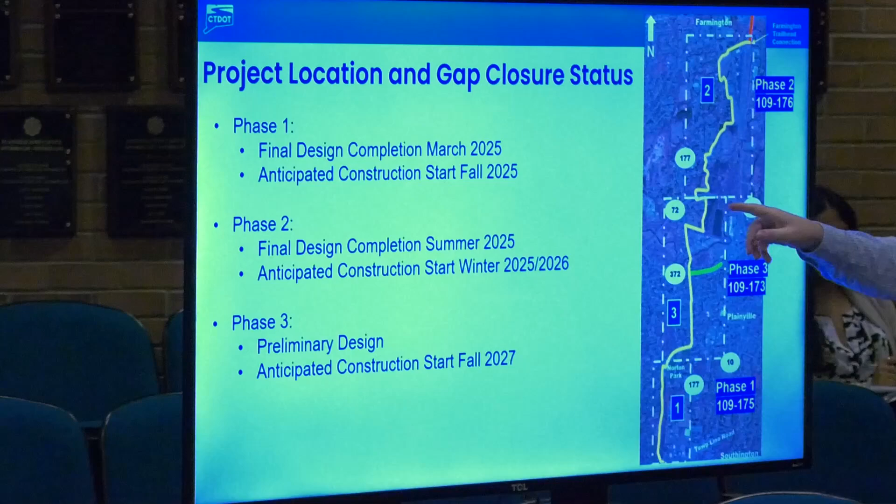Our northern section, known as Phase 2, is the trail connection up at Northwest Drive, approximately 2 miles south, through different wooded sections, through the Public Works and along Tomasso Nature Park, and then under Route 72. That is also in final design. We're getting final permits and submitting property maps. We're looking for design completion summer 2025, with an anticipated construction start around winter 2025 into 2026.

So those 2 phases are moving ahead in final design, which leaves us with our Phase 3 section. This is our middle section, what we call the downtown alignment. For today's discussion, we'll be talking mostly about Norton Park up to Route 372. Right now we are in preliminary design, with an anticipated construction start of fall 2027. For the southern section of the downtown, we're still in conceptual phases.

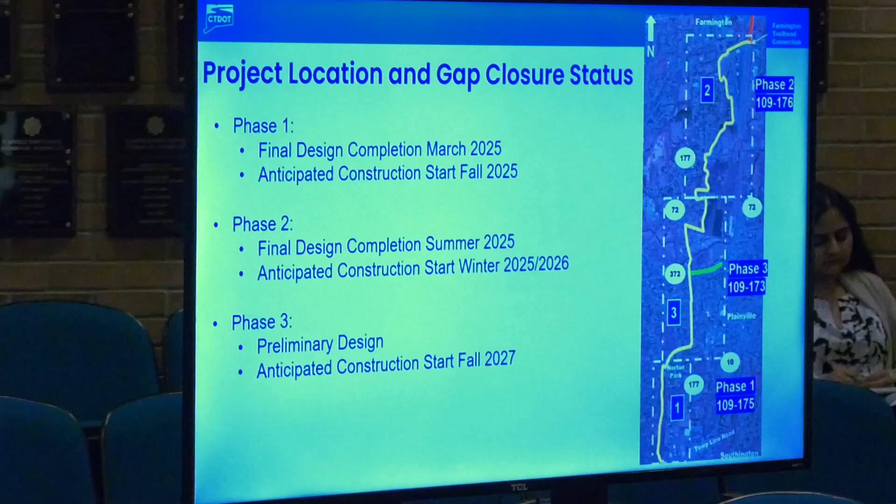So what is the purpose and need of the Farmington Canal Heritage Trail in Plainville? Our purpose is to close the final gap in the trail, again consisting of 5 miles. We don't just want to close it, but we need to provide the safest and most accessible facility for all users. When constructed, we're not looking at a couple people using the trail a day. On weekends and during peak seasons, we can see up to 1,000 users in a day, so it's going to be a very busy section.

Based on the number of users, we're not talking about avid cyclists. We're talking about families, elderly, people with disabilities. All ages and skill sets are going to be utilizing this trail. So we're not looking to build a trail for Lance Armstrong, we're looking to build it for everybody here.

When we met back in last spring, in March, we talked about two separate alignments. The first was the Pierce Street alignment, shown here on screen. From Broad Street, north is pointed this way. The trail would follow along the south side of Broad Street to the east, then cross Pierce Street, head north, and then head back west to tie into Route 177.

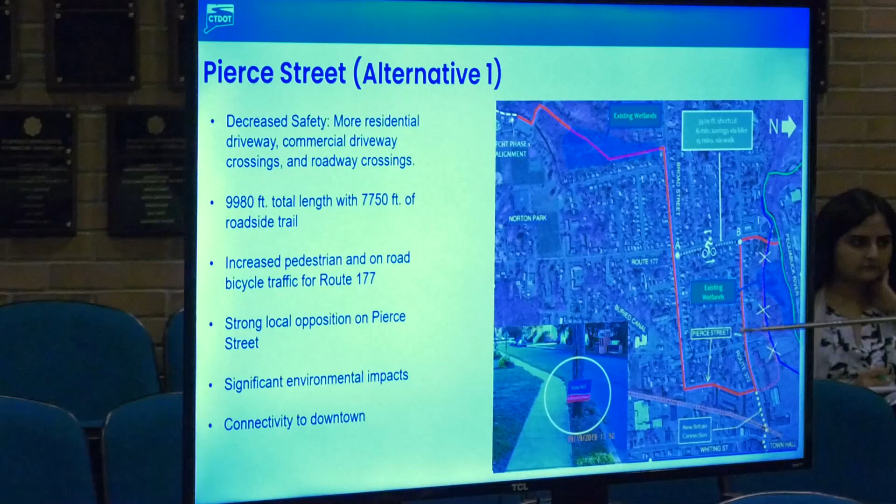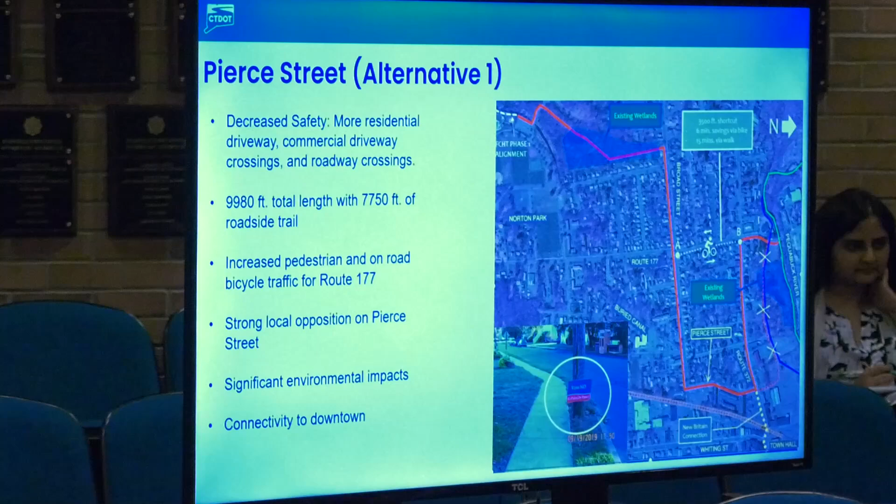Because of this significantly longer section of trail along the roadways, you're going to see a lot more driveway crossings, more street crossings, and greater exposure for pedestrians and cyclists to the adjacent roadside. That's a significant safety issue, and there's a high likelihood that once users take this trail section a couple times, they'll realize they can get from A to B between this intersection and that one and save six minutes on a bicycle, or fifteen minutes walking, by avoiding the driveways and streets. So over time, people are going to completely bypass this section of trail. Due to these safety concerns and the likelihood it will be skipped by everyday users, we are not proceeding with this design at this time.

So where does that leave us? We looked into what we call a preferred alignment, Route 177, Alternative 3. Basically from Norton Park, the trail would continue north on Route 177 through the intersection of Broad Street, then continue north through the intersection of Route 372, and cross the Pequabuck River. Significant advantages here: it's entirely on a state route, and it's a much shorter section from the park to this river crossing. Again, for safety, we're looking to get users from A to B in the safest possible way.

With reduced exposure along the roadway, and fewer driveway and street crossings, we're going to have a safer trail.

Now, this green line represents a spur trail. It would run along the south side of Route 372, be a little narrower, about 10 feet wide, and serve as connectivity to the downtown section. Our intent with this design is to help promote users to go downtown and support the local businesses there. So we're trying to accomplish two goals: get the everyday user from A to B in the safest manner possible, while still maintaining that downtown connectivity and support for local businesses.

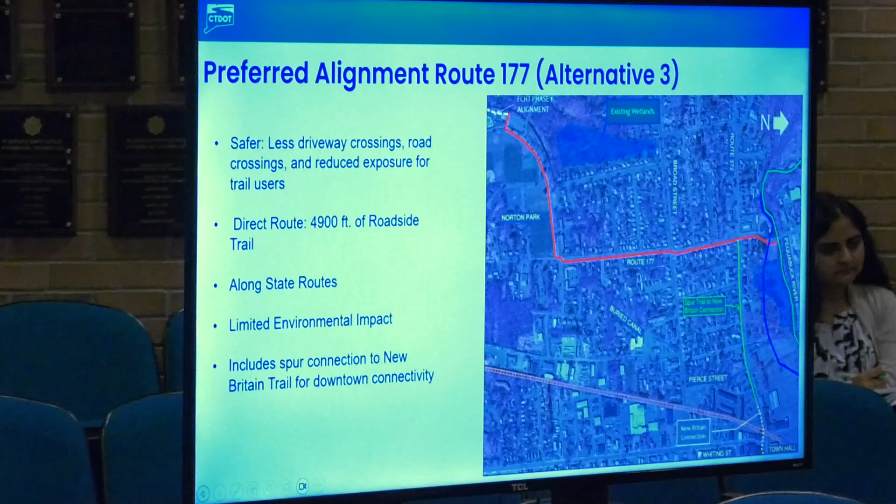Here it's kind of hard to see, and we have a printout of it over there—that's the downtown section color plan. You guys are free to take a look. I'm going to zoom in on this and talk about some of the features, because I know we can't see anything here.

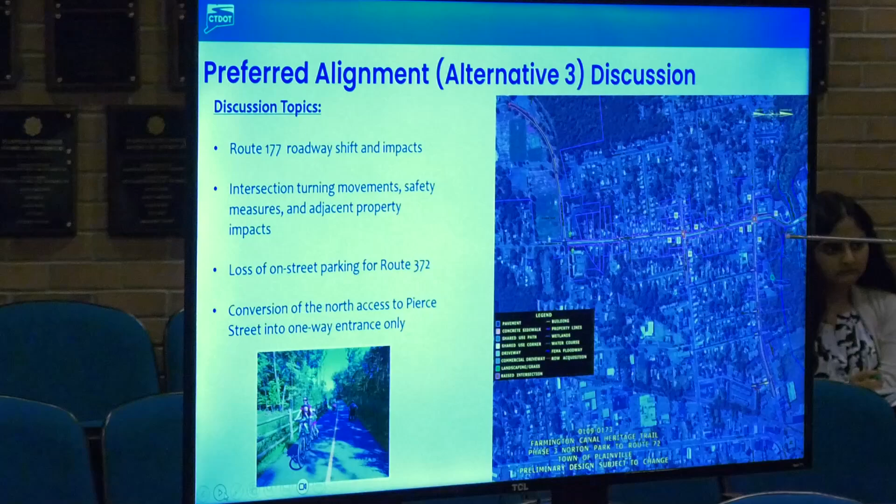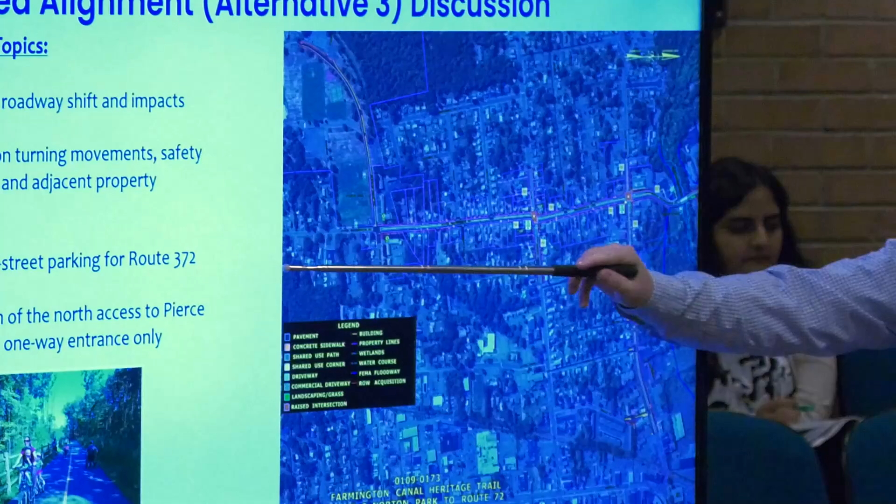When we last met with the town council, there were a couple of topics we wanted to follow up on: how Route 177 would shift and impact adjacent owners; how the intersections of Route 177 at Broad Street, and Route 372 at West Main Street and 177, would be designed; and how they'd accommodate truck turning movements with the roadway shift. Other noted concerns were loss of on-street parking on Route 372, and the conversion of the northernmost access of Pierce Street to one-way, which was designed for safety concerns.

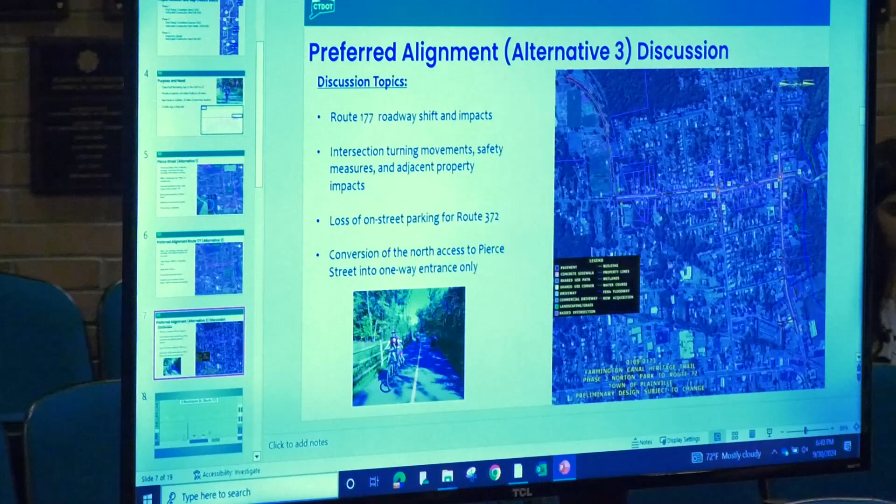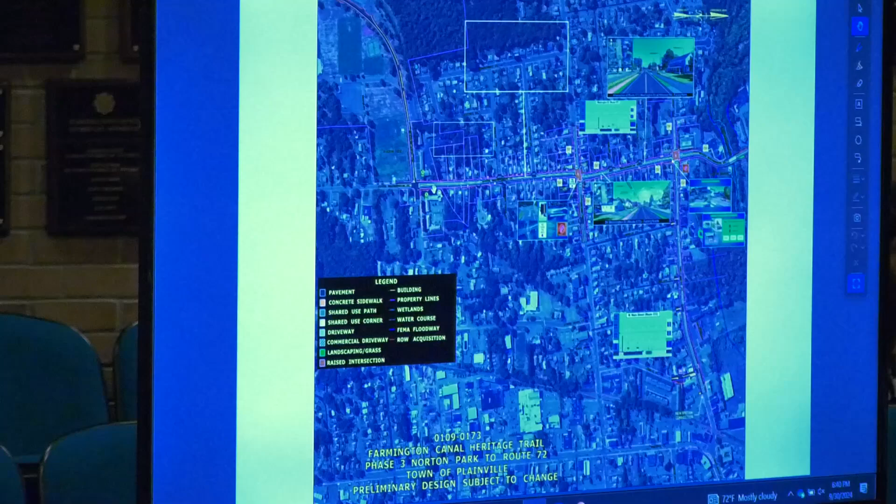What I'm going to do here is start at Norton Park, and then we'll work our way north along the trail, and come down the spur section. I'll zoom in on different features so you can see what our proposed design is and what some of those impacts are.

So let's start over here. The trail would follow along Norton Park, the existing gravel path, and head east where it would cross Washington Street. At this crossing, we would include pedestrian safety amenities such as a rectangular rapid flashing beacon, and then the trail would continue north along Route 177.

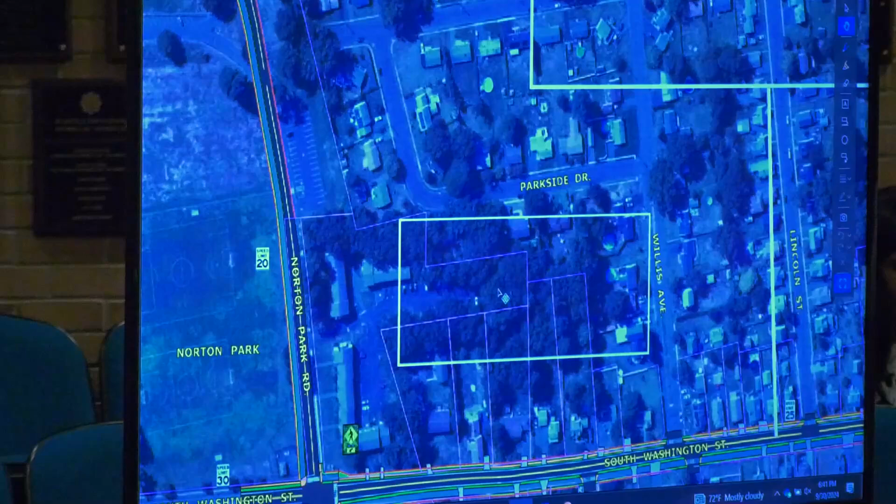See, does it want to load? Yeah. Just give me a second here. I might have to close out some of these files and reopen this. Sorry, folks.

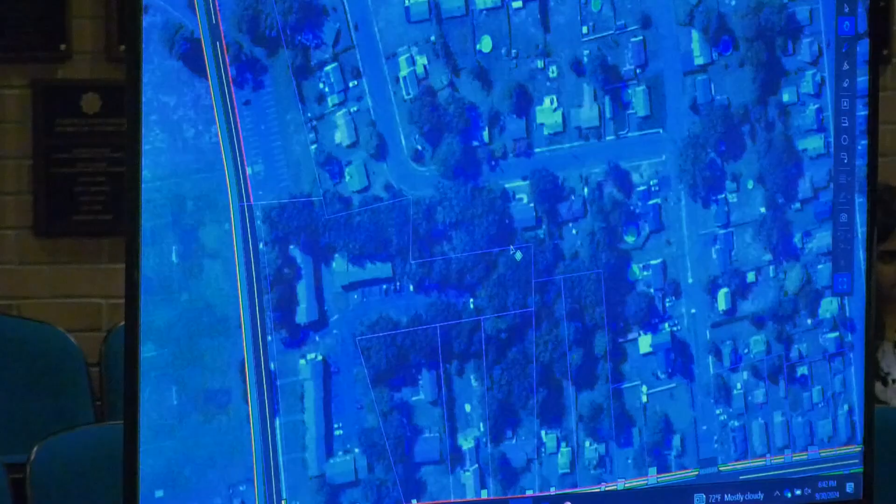All right, we're back.

So first I'm going to look at South Washington, Route 177. It's a little hard to see here, so I'll explain it. In order for us to build a 12-foot trail along the east side of Route 177, that would require us to shift the roadway, the center line of the roadway, approximately 7 to 8 feet to the west, and then tighten up the roadway geometry a little bit.

Now this would require sliver property acquisitions along both sides of Route 177. Approximately 1 to 2 feet acquisition on the eastern side of Route 177, and then slightly larger, approximately 5 to 6 feet, along the western side.

And then we have this image up there on that table. Here's a graphic rendering of what the trail will look like, to scale as best as we can. We don't have graphic design degrees, but this would include our 11-foot lanes, 2-foot shoulders, our grass buffer, and then our 12-foot trail along the east side of Route 177.

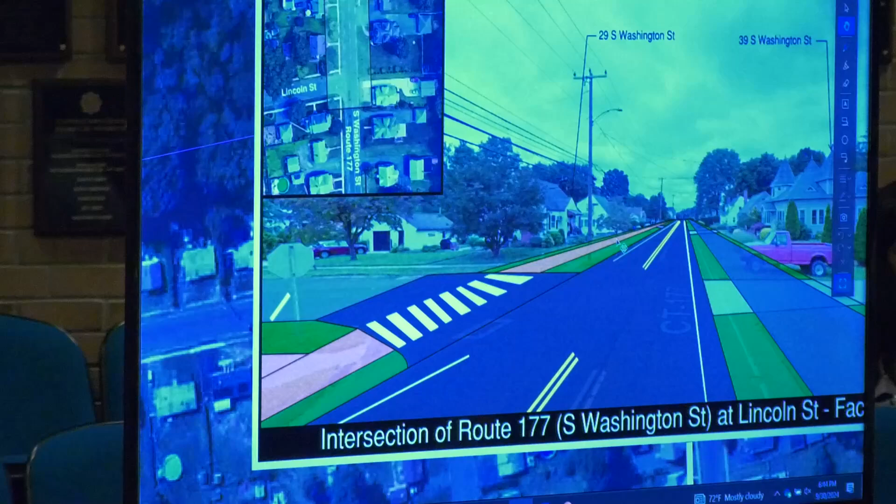So that's a pretty typical condition for South Washington Street. I'm going to jump up to the intersection here. This is Broad Street at Route 177. So some safety features we're looking to implement here.

Come on, man. Yeah, we're going to swap it. Luck with this computer.

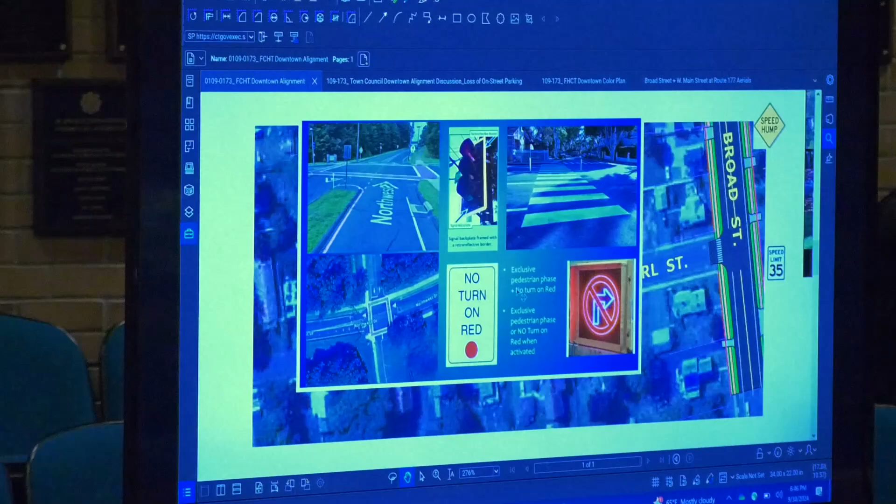All right, so hopefully I can get 10 minutes here without this dying on me. Sorry. Okay, so safety features at the intersection of Broad Street and Route 177.

What we'd be looking to do here is soften some of the curve radii, which is going to help with our turning movements, and I'll put up a graphic on that in a couple minutes. We're also looking to install a raised intersection, basically elevating the intersection slightly starting at the crosswalks, to help slow and calm traffic coming into the intersection, providing greater safety for our trail users and pedestrians. So it's not a speed hump.

These are designed with a kind of curve pattern, and they're only about 3 inches high in height. So basically, we'll be raising the intersection slightly to help slow speeds.

Additional measures we would implement at the intersection: this would have no turn on red for all right turns, and would have an exclusive pedestrian phase. So what does that mean? That means that if you ever push the ped button, every light will turn red, and pedestrians will have full access to the intersection, and vehicles won't be moving until those pedestrian crossings are complete.

So again, we're still at the same location in this graphic, looking at the intersection. That pink or magenta line, kind of like a T-Mobile color, represents the existing roadway geometry, the existing edge of roadway. The black line represents the proposed pavement. So you can see we're softening the radii or curves at each of those turns, which is going to help with our turning movement.

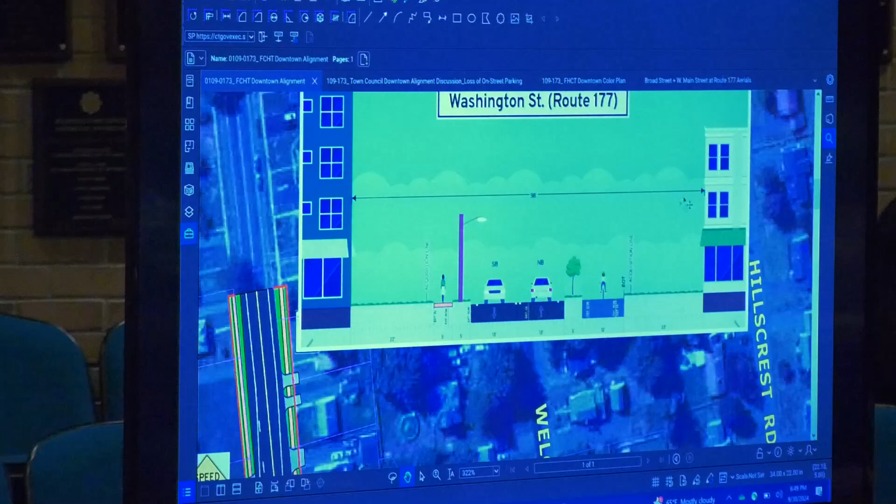In order for us to accommodate this design, it's a little bit less of a roadway shift. We're moving the roadway about 4 feet to the west. Same concepts with the grass buffer, street trees for improved traffic calming, the 12-foot trail, and more or less the same private property acquisitions on the east side of the roadway. On the west side, we're a little bit tighter. It looks like we're looking at about 2 to 3-ish feet of sliver acquisition along the west side of Route 177.

And then here is another visual rendering of what the trail will look like, or could possibly look like, along Route 177, given the dimensions that I just discussed.

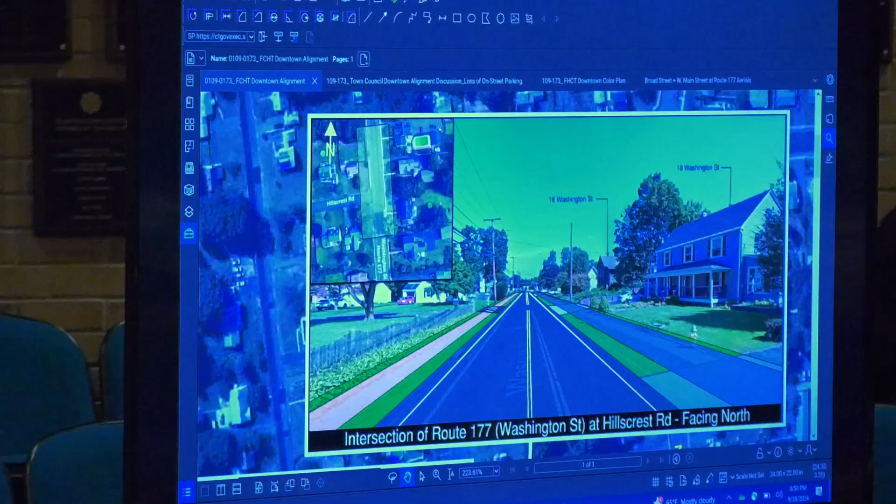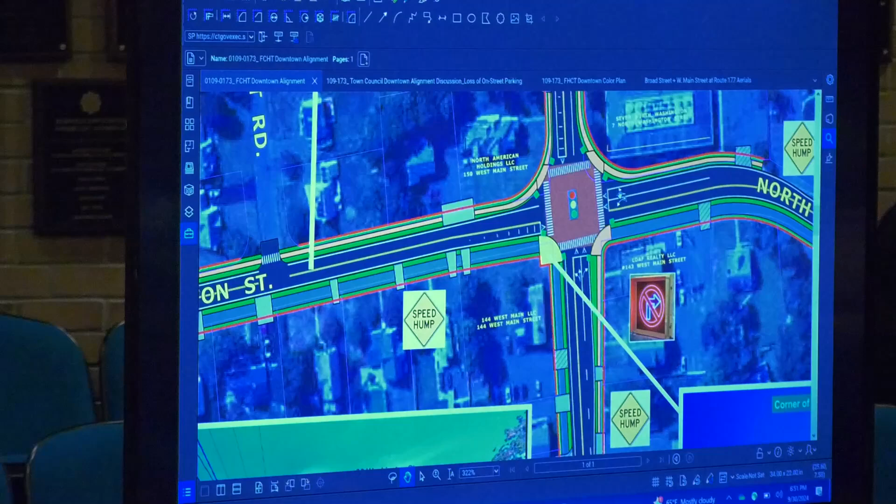Continuing north, same concept with the trail until we reach the intersection of Route 372, West Main Street, and 177. Again, here we have a lot of the same safety features. We're proposing that raised crosswalk, potentially no turn on red for the right turn movements, softer radii for those truck turning movements, and high visibility signal heads, basically to make it easier for everyone at night to see these signals. Additionally, with all of our trail crossings, wherever we need to increase illumination for safety, we would do so.

Again, looking at the same intersection, we're at 372 and 177. The pink line is your existing edge of road, and the black, the blacktop, is our proposed roadway surface. For both the right turn movements from Route 177 onto 372 heading west, and from 372 eastbound onto Broad Street to the 177 to the south, we are improving those turning capabilities to meet our tractor trailer truck needs. On the other side of the intersection, we're not improving those turning movements, but we're going to maintain the existing movement in order to avoid significant acquisitions from those two businesses at the corner — that's your northeast corner and your southeast corner.

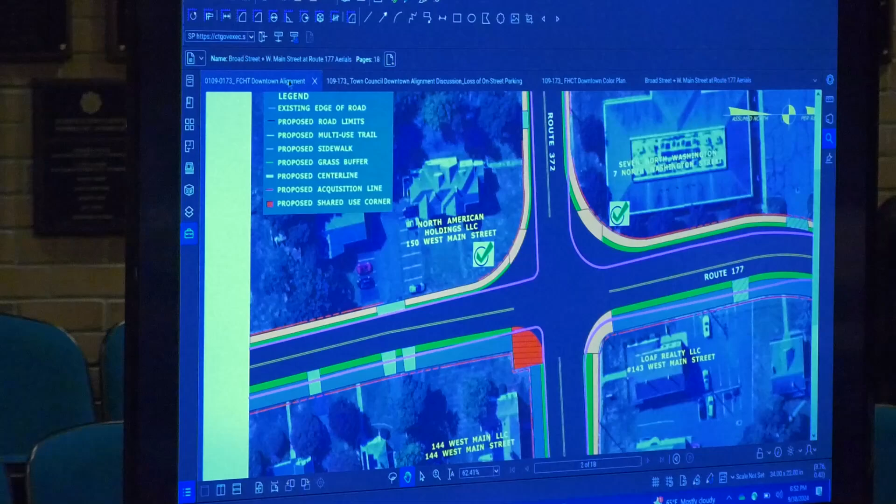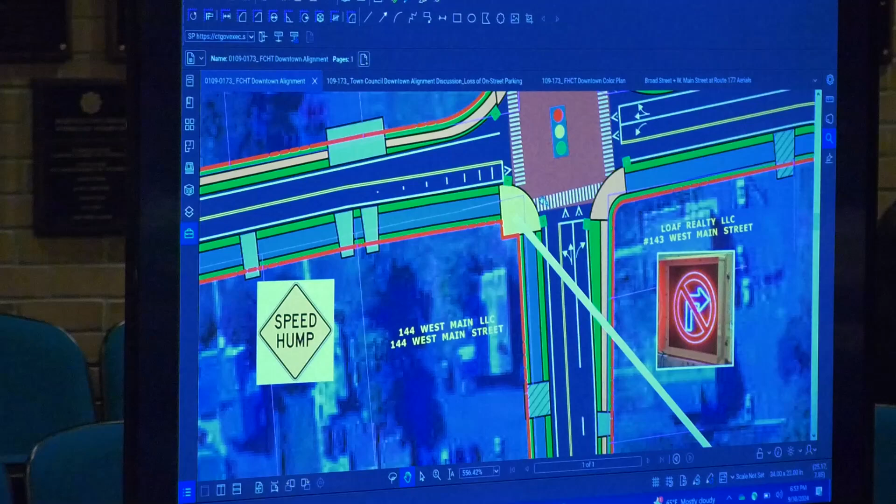Now, staying at this intersection, here along the southeast corner, one thing we're looking to do to help promote connectivity to the downtown and support local businesses is to provide this shared use corner along the southeast corner. It may look something like these other locations we found within the area, with benches, plantings, kiosks, and advertisements for local businesses, so they can help attract users to use that spur trail and make that downtown connectivity.

And again, here's just some more images of those amenities we'd be considering: planters, benches, and some form of sign directing users to the downtown section and how long that trip is going to take. So on a bicycle, we're looking at a 4-minute ride, and walking, about a 10-minute ride, with potentially advertisements that rotate out for the local businesses.

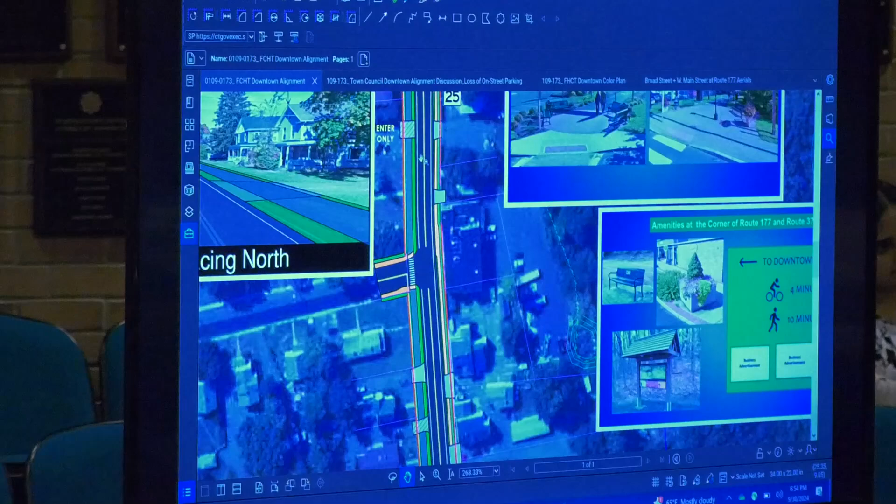Okay, so now taking a look at our spur section, it's a fairly similar design concept to what we were looking at on Route 177. So in order for us to get a 10-foot spur trail along the south side of the roadway, we're going to tighten up the roadway by going down to 11-foot lanes and 2 to 3 foot shoulders, depending on which side, while maintaining the existing sidewalk on the northern side. We want to tie in to the existing sidewalk where it falls today.

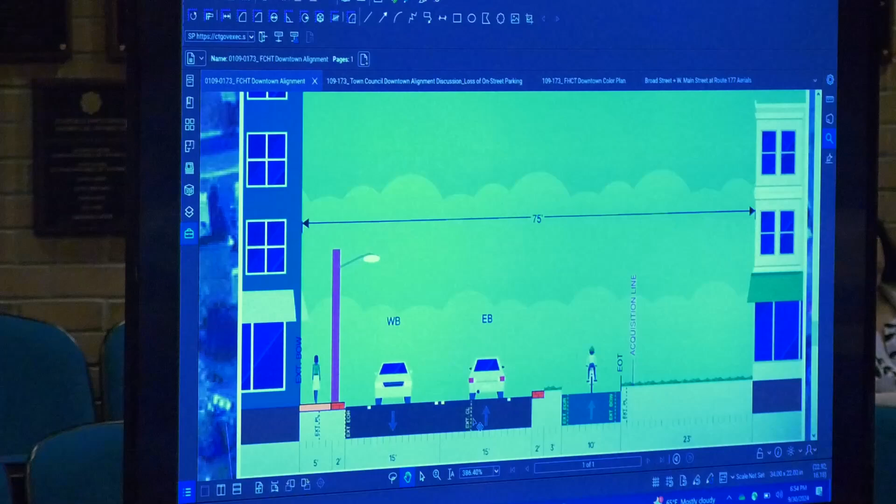So in order to do that, we want to keep the existing sidewalk basically exactly where it is now on the north side. To accomplish that, we have to shift the center line approximately 4 to 5 feet to the north along the roadway. We'll have 11-foot lanes, 2-foot shoulders, and the 5-foot sidewalk on the north side would remain, with a 2-foot buffer, either grass or stamped to match the downtown section of Plainville, and then a 10-foot trail for that spur connection. Here we're looking at fairly sliver impacts as well, 1 to 2 feet property acquisition along the south side of Route 372.

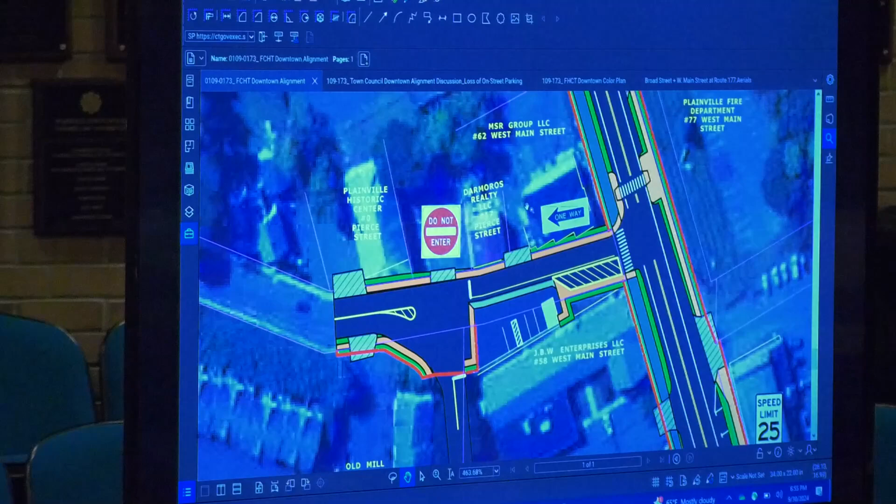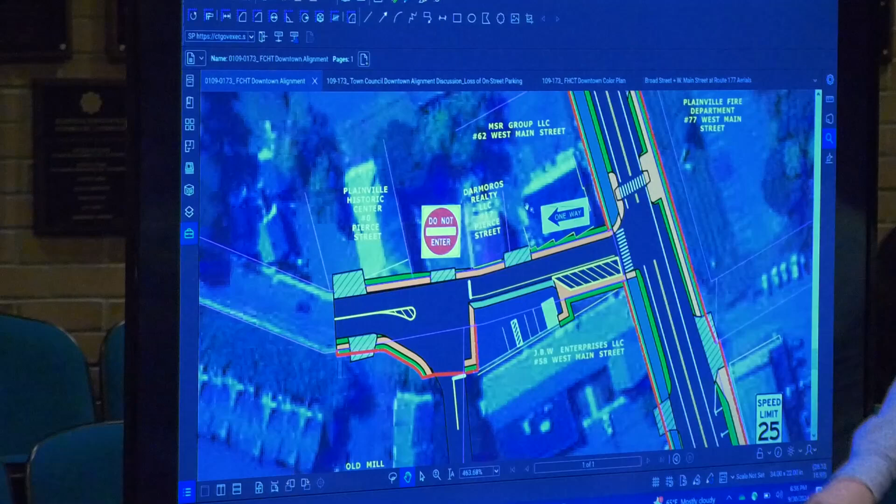Okay, so now we'll jump to Pierce Street. What we're looking to do on Pierce Street is convert the northern end of the street access to one-way. The reason we're looking to do that is to increase safety at this crossing. Because of this building here, number 58 West Main Street, the sight line from this side street is non-existent, so it's an unsafe condition for both motorists and trail users trying to cross here. So what we would do is convert this access to one-way, so you can make a right or a left from West Main Street onto Pierce Street.

Additionally, we have this yellow area here, which would be marked as no parking, and this would be pavement. The reason we have this here is because we know the fire department is here, and we do not want to impede their access down to this end of the neighborhood. So this area would stay paved, allowing the fire engine to make their right turn movement down this street.

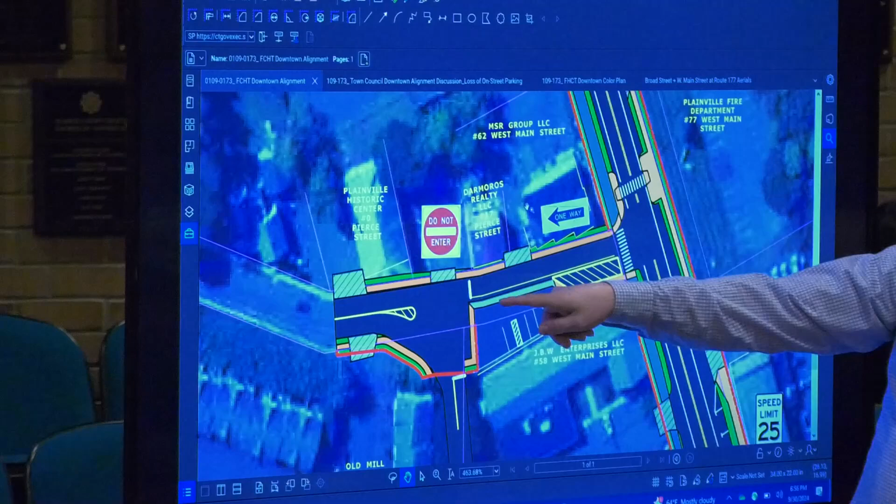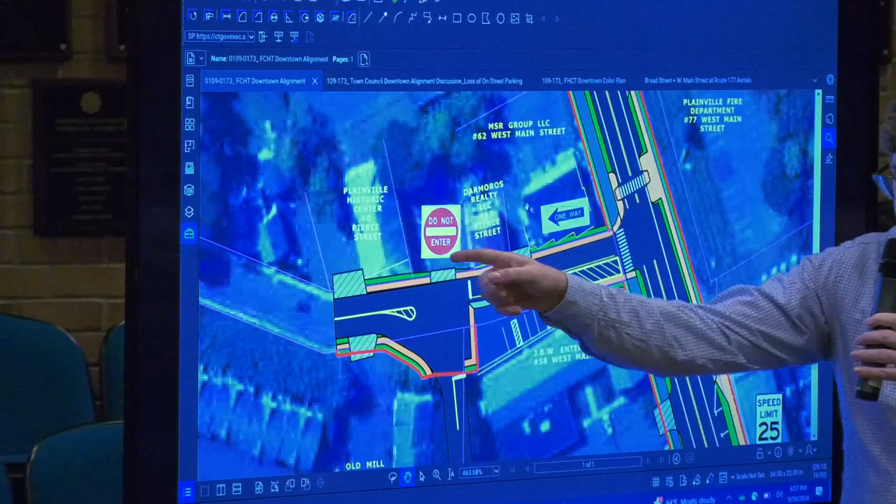Additionally, we would provide kind of a cul-de-sac here. This would be a stop sign for users coming from the north, and this is going to allow your everyday pickup truck or passenger car to easily make a U-turn, while delivery trucks may have to make a 3-point turn to move around and get back. So another thing we'd want to do is add signage down at the southern end to say no outlet or no through trucks at this intersection.

So again, staying in this Pierce Street, Route 372 area, we want to talk about this because the town had brought up concerns with loss of on-street parking on West Main Street. The addresses of concern were 100 West Main Street, the Vital Life Services, and the residential addresses of 98 and 94. There's approximately 4 on-street parking spaces for each of those, so 8 on-street parking spaces there.

Now, each of these facilities does have parking in the rear. We went out and took a look, and we would have to have discussion with these owners in the future. However, with this spur connection to the downtown section, and eventually later to the New Britain trails that are going to be constructed with connection to the fast track, we believe that the gain of this spur trail along Route 372 outweighs the loss of a few spaces on the roadway.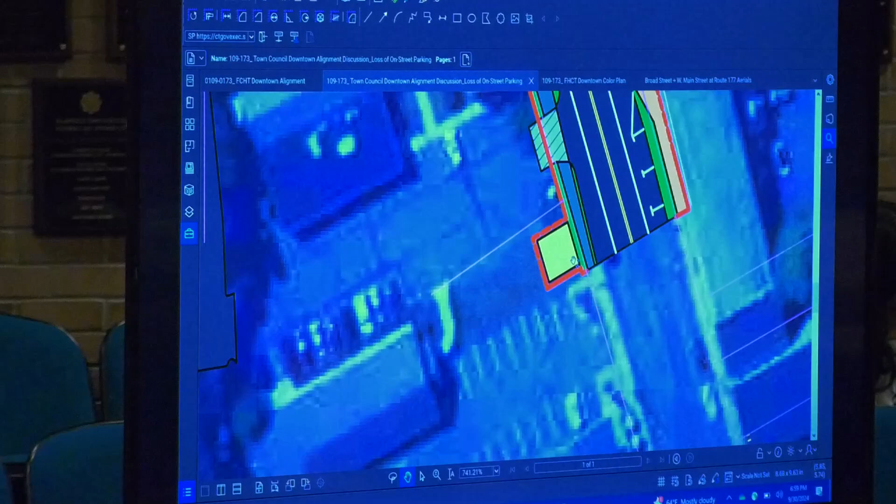Okay, so here's where the trail spur will tie into the downtown section. We are just a few hundred feet to the east of Pierce Street. We would tie into the existing roadway width, maintain the on-street parking to the east of Pierce Street, and then here we have this yellow area where we would like to provide maybe a concrete pad or a stamped pad for bike racks, benches, etc., so people can dismount and then walk into town and visit the businesses within the downtown district.

So I believe that is all I have that I would like to present to you today. At this time, if there are any questions or anything you would like to discuss.

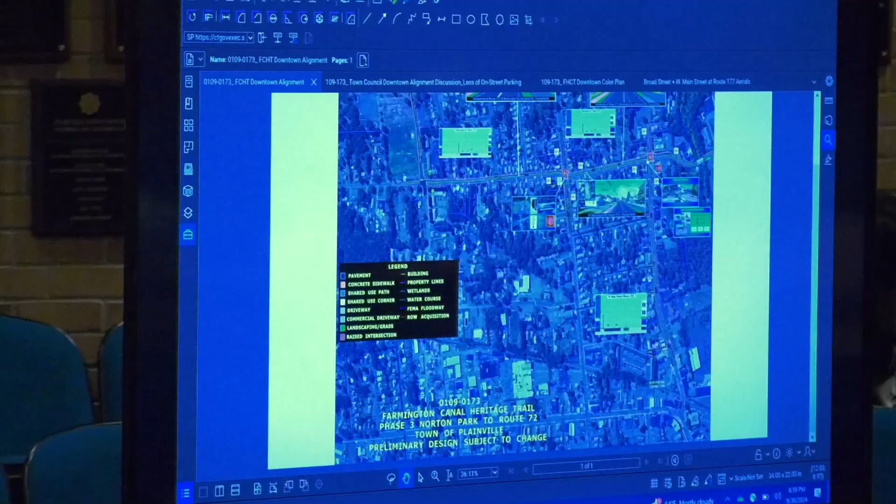I have a question. When would the start date be for phase 3? Pending acceptance of the alignment, the anticipated schedule would have construction start fall 2027.

And end when? We haven't done a calendar day estimate. That's when we take all of our construction quantities and figure out how many days it would take to build. Based on the size of this project, we're looking at 2 miles, I would say at least two years.

Thank you. Mr. Chairman, I have a question. I don't know if you covered this and I missed it, but the signals at the intersections of Broad Street and South Washington, Washington, and 372 and 177 - is that all manual triggers, or is there some other kind of trigger? I know in Simsbury, when someone is coming up to Hot Meadow, there's something in that pathway that triggers the blink.

Sensor that triggers. Right, there's sensors there that trigger the blinking lights that let drivers on Hot Meadow know that somebody's coming to the trail. So I don't have that answer right now. Those are details we would sort out later in the design phase, because that's where we're looking to get our traffic people involved, traffic electrical involved.

Because it is an intersection roadway, especially with the two state routes, I would think most likely it would be your typical pedestrian push button. However, these are things we can discuss with our electrical folks for sure. So pedestrians would not have the right of way then, correct? No, it would be a typical intersection crossing, so you would push the button and then you would get your signal to cross. All right, thank you.

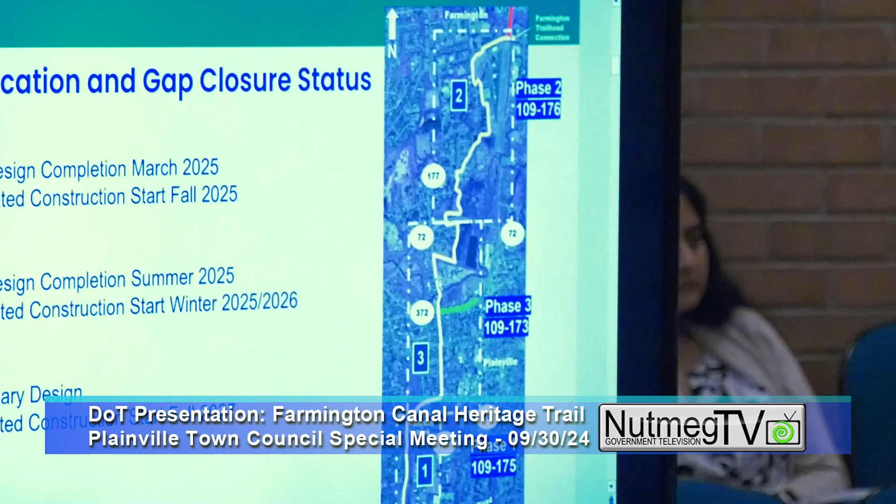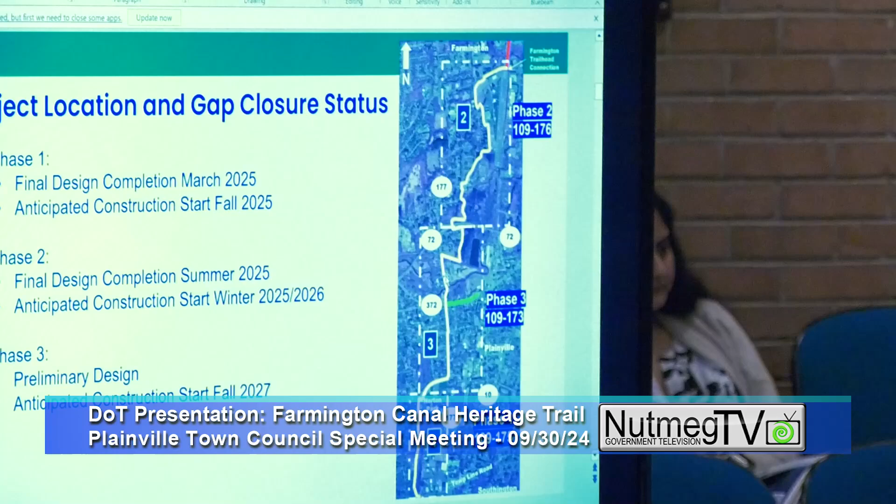And on the northern end, we are tying in at the existing trailhead on Northwest Drive, adjacent to, across the street from the airport. So there's a part where it comes out of the park going south. Where does it go coming out of the park? Heading south, through the woods there, behind the pool — going directly south, there are woods there.

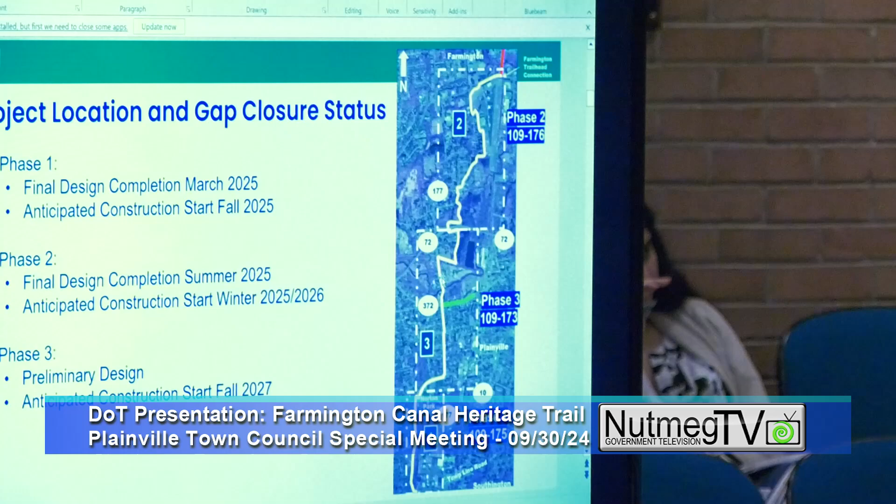So basically we'd be going through the woods on top of what is known as the old towpath for the Farmington Canal. And where does it come out? It continues right along the canal, then veers to the east slightly and pops out right at Redstone Hill at the intersection there — at Town Line Road and Redstone Hill.

Do you know where those culverts are? In between the houses, Robert Jackson, and the industrial area — exactly right there, yeah. So Southington would come up to meet it? Yeah, Southington would be coming up Redstone Hill. As far as I know, they're building their trail along Redstone Hill, and they're going to tie in to our crossing — they're on Redstone Road, I'm sorry.

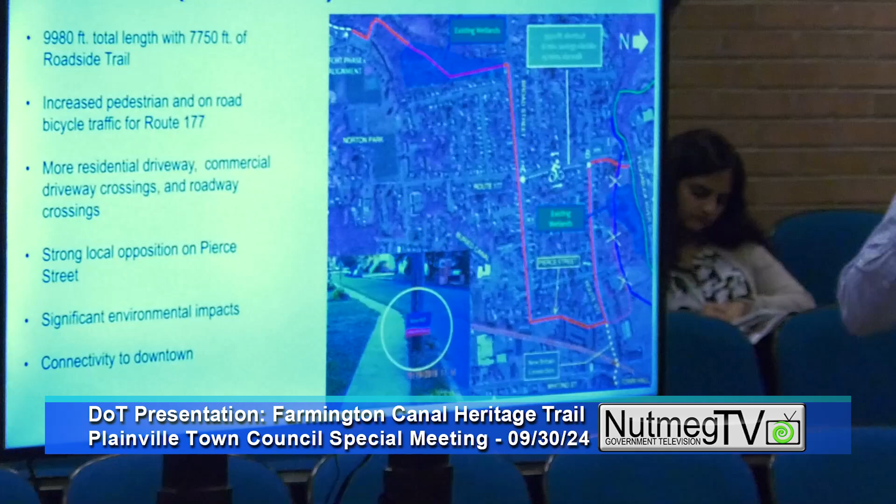Let's see, let me just go to this slide. And then we can follow up via email or further discussion on some of the other alignments that we looked at. Coming here through the north here, this is existing wetlands, so for us to build a trail through that section, that would all be on a boardwalk structure. That bridge structure eventually would be part of the town of Plainville's maintenance responsibility for this long section of boardwalk. Additionally, coming down here and then back up, our main concern is with the number of driveway crossings and the roadway crossings.

If we want to have further discussions about terminating here and going north, we can at least talk. That's the only section of Broad Street I was talking about, west of Route 177.

That's all wetlands behind the houses on Hemingway Street. We've been back there and checked it out, so we can't go in and build a trail and fill there, that's significant quantities of wetlands and a very high risk for permitting. On some sections we've built boardwalks, but that's a long section of boardwalk structure.

How wide is the road right now between Broad Street and Norton Park, on Route 177? Off the top of my head, probably around 30 feet, 29. If you're going to add a 12-foot trail to that, I think your numbers are off on how much land acquisition you're going to need. Very off.

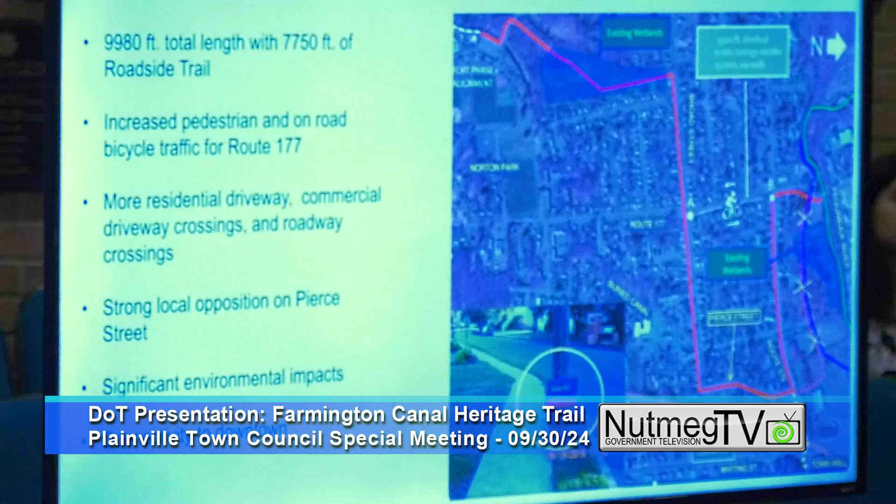Okay, well we can take another look and have follow-up discussions. Right now, tonight's meeting, we're looking for the town to consider the alternative alignment, so we can follow up next week with potentially a go-ahead or no-go-ahead for initiating our design of that alignment. We're not looking for anybody here to say tonight yes or no, we have the week to sleep on it.

And by the way, I am 100% for the trail, I just need to make sure it's going to be right. Sure, and I understand your concerns, especially considering rights of way. With all these alignments, we are going through an urban downtown section, there are going to be acquisitions, it's unavoidable.

My other concern with the acquisitions is resale value. I think people are going to have a hard time selling their houses. Unfortunately, I can't provide any answer to that. I know, yeah.

And I believe you said now the traffic lanes are going to be 11 feet? 11 foot with 2 foot shoulders, yes. Okay, and that would be how much difference from now? Right now they're about 11 foot lanes, but you're looking at 4 or 5 foot shoulders out there. Some of the lanes widen out to around 13 feet.

All right, my turn I guess. Trying to summarize, my concern is that back in March this was kind of the first time we heard about this potential alignment, or at least the first time I heard about it. I don't think I missed anything because I've been here from the beginning about this.

I understand there's concerns, even behind the firehouse, because I think that's where we first started, actually taking the trail behind the firehouse. I understand that's just too wet, too many issues, that's a floodway, floodplain all back there.

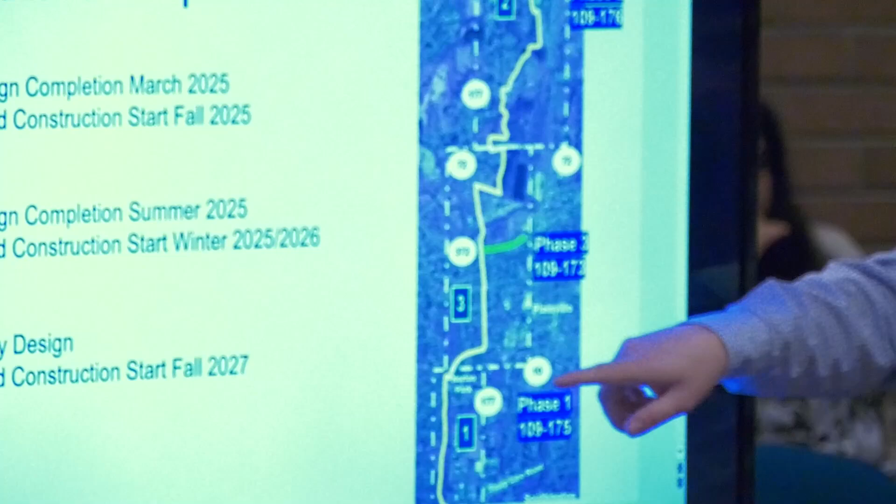Maybe I can pull up Street View, I may be able to find it. You can't see the map from here. Yeah, it's kind of small here, but I'll explain it moving north. So here, that green is 372. We would continue north, widen the bridge over the Pequabuck River, follow along the frontage of what is Clean Earth, that business there. Continue to the north until we get to the railroad. At the railroad, we will either have to build a new pedestrian bridge over the rail line or follow the same concept over the Pequabuck and widen that other bridge structure to get our trail across.

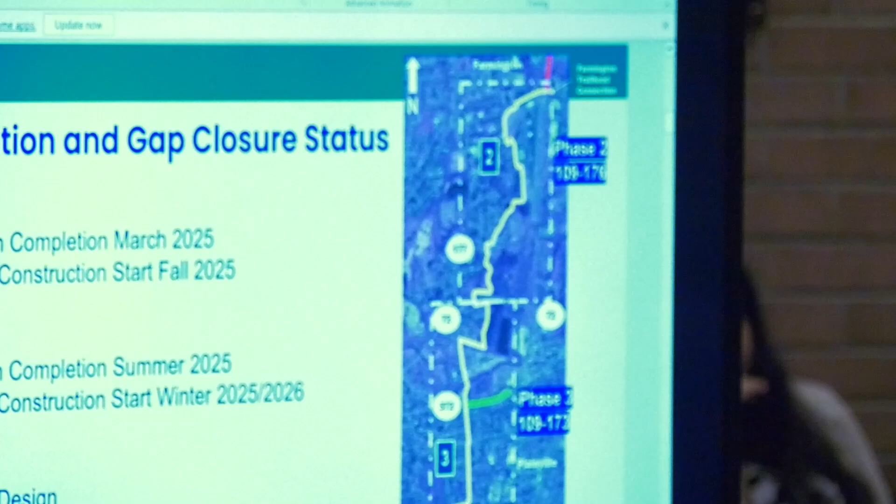So that's the bridge over the rail. Once you get across the rail, it will take a hard turn and head east down that existing Plainville maintenance road, adjacent to the cemetery - correct, adjacent to West Cemetery there. From there it would continue north, upland of the pond here, Toffelon Pond I want to say - I hope I didn't butcher that pronunciation - but continue north along the upland area of the pond where we tie into our phase 2, where we're building a tunnel underneath Route 72. So that section of the alignment north of 372, we have a pretty good handle on the design moving forward because it's mostly wooded, so we're able to utilize the existing woods and existing town-owned property. And so once we get south of the Pequabuck River, that's where we run into those design challenges.

This is going to come to the back of the cemetery? Yeah. Yes, but closer to the pond, so it follows up on top of the slope of the pond. Okay.

All right, any other questions, any other follow-ups? I think we're just looking for a consensus to continue on to that next step. I certainly am okay moving to that next step.

Having said what we've said here tonight, and hearing that there are going to be opportunities for the public to speak, and everybody who wants to can have their time to say what they want to say. So I look for any other council members.

Is everyone comfortable with letting them go to the next step? I'm comfortable with moving forward, but we can still make changes. So again, this is a concept or a preliminary design. So what does preliminary mean? There's going to be changes, right?

I don't want to say we're going to move the trail to the other side of town, but there's a lot of design details that we'll sort out. Same thing, we've done this with the phase 2 section, and we've done this on the phase 1 section as well. When things have come up that we felt needed the attention of the town council, we brought them to the town council and had them review them, such as additional parking lots or design using the outskirts of Tomasso Nature Park. So we will be in continued communication with the council moving forward for sure.